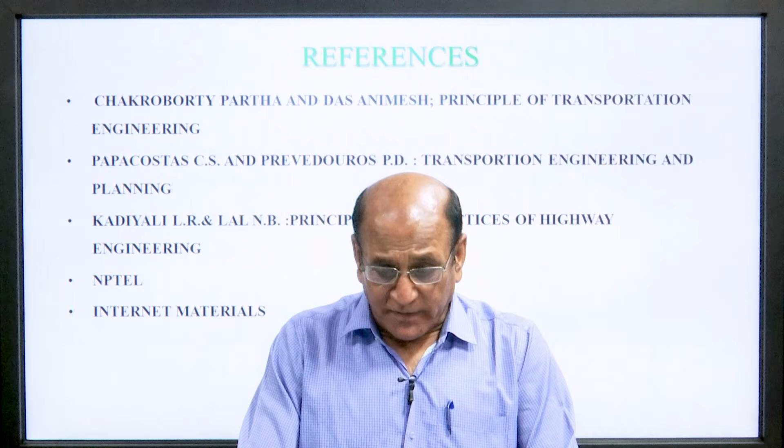References that I have taken as usual: Chakroborty Partha and Das Animesh, Principle of Transportation Engineering; Papacostas and Prevedouros, Transportation Engineering and Planning; Kadiyali and Lal, Principle and Practices of Highway Engineering. Some part have been taken from NPTEL and some part have been taken from internet.

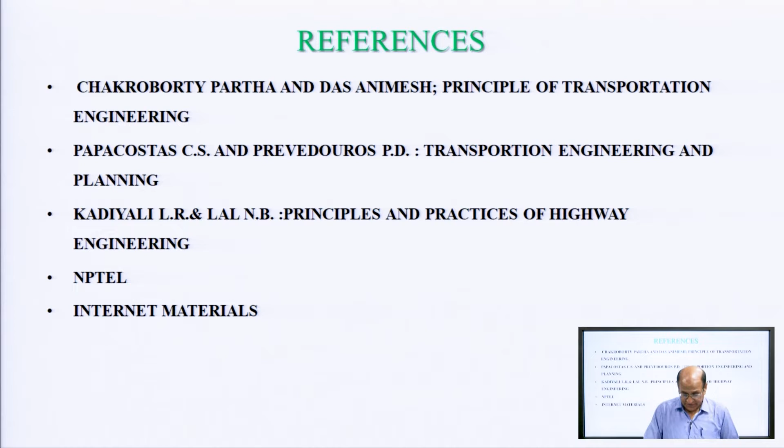The content that we will cover today are urban growth, private vehicles and pollution, land use, urban density, travel pattern, right of way, parking policy, mobility, urban mobility with smart city technology, smart traffic system, future of urban mobility, upgradation of urban mobility policies and standards, and designs for urban mobility.

So first of all, urban growth. One of the biggest problems of urban transport has been its inability to keep pace with the population growth in the city. While urbanization and the growth of the city contribute to economic growth of a city, unplanned growth cannot be sustained in the longer term.

A city that is planned from the beginning for more population, infrastructure and public transport is better equipped to tackle growth. All cities will witness economic growth, but an unplanned city will stagnate due to deterioration of quality of life, while the planned city will continue its progress.

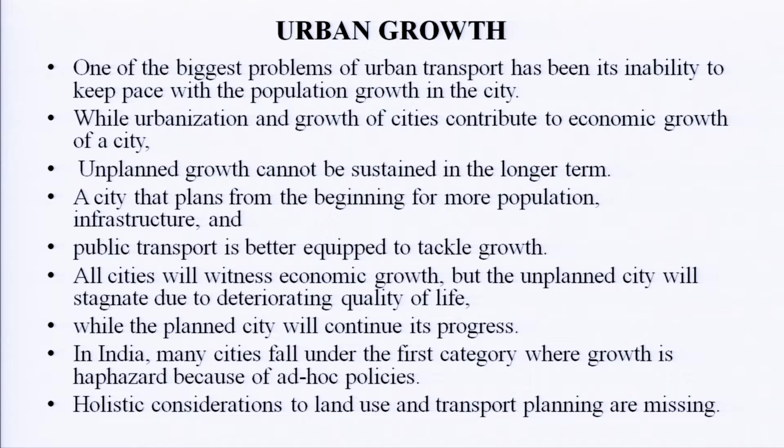In India, many cities fall under the first category, where the growth is haphazard because of ad hoc policies. Holistic consideration to land use and transport planning is missing.

Private vehicles and pollution is a big problem for our country. More and more people opt for their own vehicle. The rise in income level, easy availability of loans, and the status afforded by owning a vehicle has led to tremendous growth in private vehicles.

People who cannot afford their own vehicles opt for other transport modes such as auto rickshaws, chakdas and private minibuses, etc. These vehicles do not always adhere to pollution control norms and result in deteriorating environment.

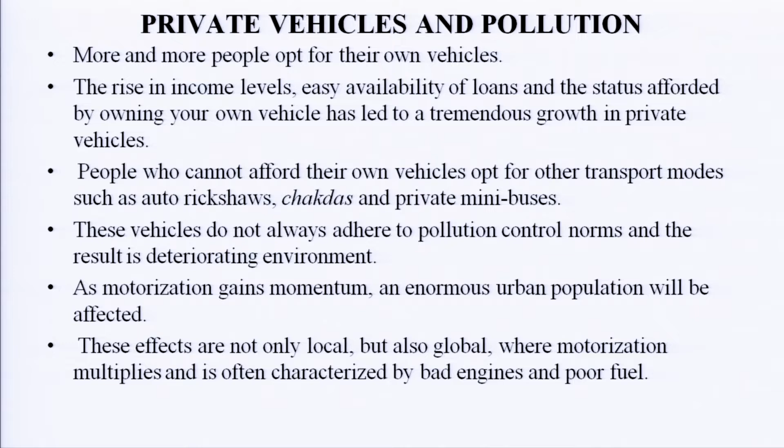As motorization gains momentum, an enormous urban population is affected. These effects are not only local but also global, where motorization multiplies and is often characterized by bad engines and poor fuel.

Pollution associated with transportation is not only from the growth of the number of vehicles, but also from urban sprawl.

Dirty fuel, poor traffic management, and a high proportion of smoke-belching vehicles such as old and ill-maintained buses, auto rickshaws, and two-stroke motorcycles.

In India, development plans and transport plans are taken up as independent exercises. The transportation plan depends more on data than strategy and tends to accept the development plan as sacrosanct.

Generally, they do not make recommendations on improving the development plan and are undertaken as a study meant to reinforce and promote pre-conceived ideas like road widening, grade separators, LRT and metro.

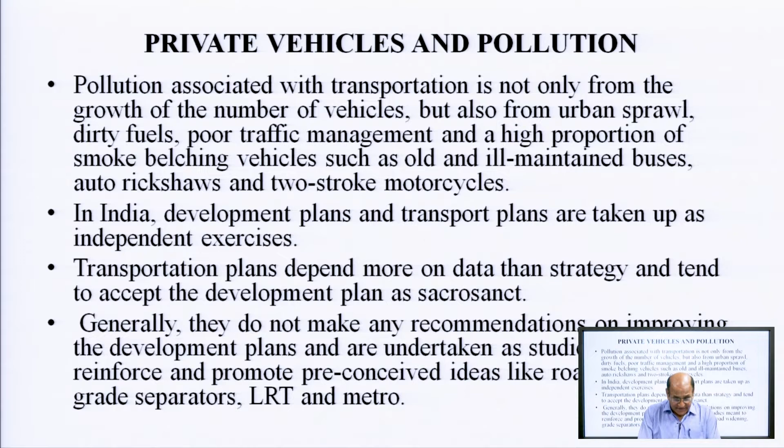Land use is a very important aspect of urban transportation system. We will discuss it separately also, but here we will cover it slightly. In urban transportation system, there is a fundamental relationship between land use, demography and transportation.

Where people live and work, go to school or shop decide the exchange of trips between different areas and roads. Socio-economic, cultural and demographic factors like employment and family income influence the number of trips and how they are made.

The urban transport system affects the accessibility of land and its value, and therefore urban transport is a tool to shape the urban development and urban form.

Ideally, land use planning and transportation planning should go hand in hand. When this is not done, fundamental flaws are built into the city's structure.

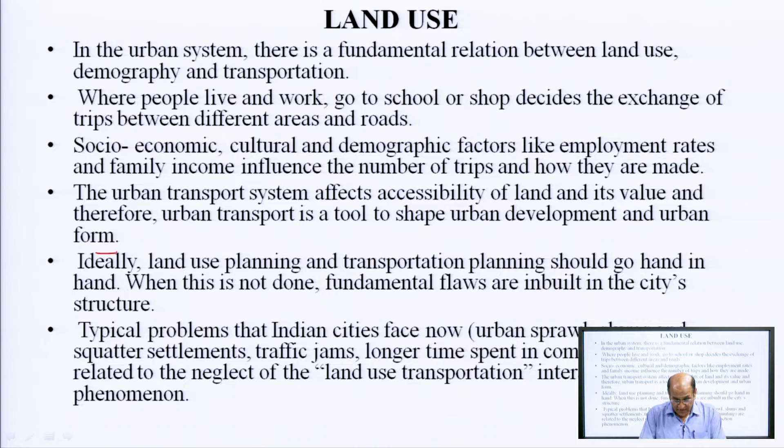Typical problems that Indian cities face now: urban sprawl, slum and squatter settlements, traffic jams, longer time spent in commuting are related to neglecting the land use transportation interaction phenomena.

Most cities that do well with regard to transportation and land use planning tend to be otherwise well managed, which includes being fiscally and financially sound.

Cities that neglect this reality face fiscal and financial difficulties and generally bear heavy environmental costs, and also issues of social equity in transportation remain unaddressed.

The disciplines of urban transport, urban geography, urban economy, city planning and environmental study have long recognized the land use impact of transportation decisions.

For example, when the planner considers widening of an arterial or raising the minimum parking standard, they are generally focused on direct financial cost and give little consideration to factors such as social and environmental impact of increased pavement.

Yet these land use impacts can be comparable in magnitude to other costs and benefits that are normally considered in transportation decision making.

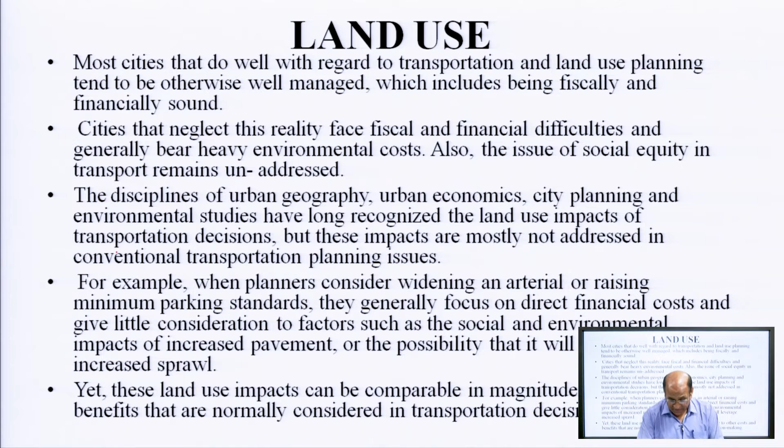Now, with the city having such scattered land use, density gets affected. The ideal city form we are looking for has higher density at the core, at nodes, and along the transport corridor - nodes, core and corridor.

With density gradually receding away from the center or the node and away from the corridor, these dense city core, node and corridor may be in the form of a central business district with the land use mix that is appropriate for local context.

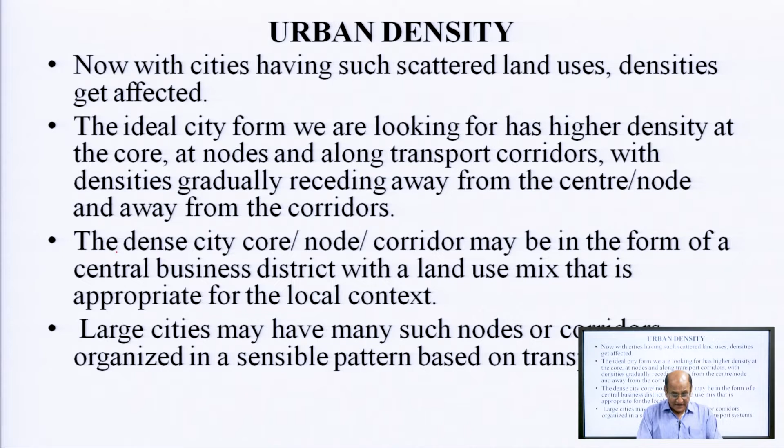Large cities may have many such nodes or corridors organized in a sensible pattern based on the transportation system.

Now come to the travel pattern. Uncoordinated land use and density pattern always result in a skewed travel pattern. In such scenario, it is not unusual to find office buildings scattered over the city, mixed with other land uses.

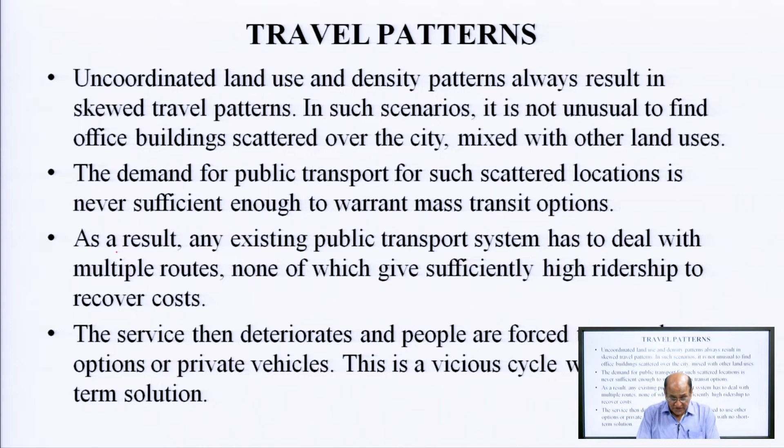The demand for public transport for such scattered locations is never sufficient enough to warrant a mass transit option. As a result, any existing public transport system has to deal with multiple routes, none of which give sufficiently high ridership to recover cost. The service deteriorates and people are forced to use other modes or private vehicles. This is the vicious cycle with no short term solution.

Road patterns are important. They constitute almost 20% of the city land area and are the most important public open space for the city.

Roads define the city structure and influence its spatial growth, determine infrastructure network, and influence the efficiency and productivity of all sections of society. Planning and design of a road network is necessary for ensuring smooth and efficient flow of traffic, safety of the road user, and lowering of air and noise pollution.

Facilitating efficient planning of infrastructure network, increasing the efficiency of the labor market, supporting efficient and economical public transportation system, facilitating more efficient economic construction and maintenance of a street.

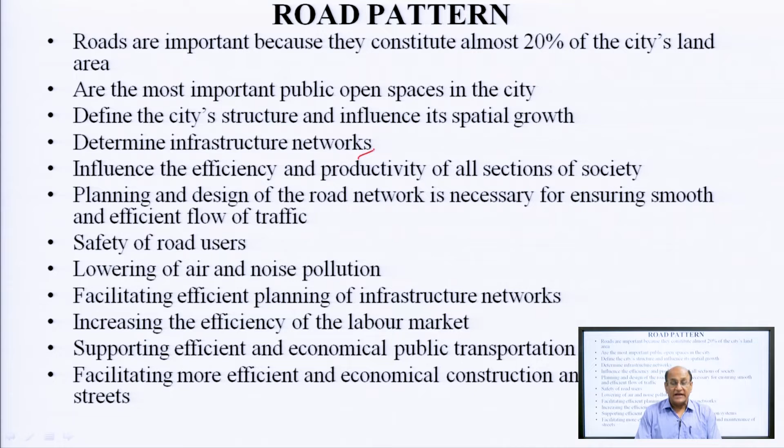Right of way. Another common problem in Indian cities is underutilization of right of way, ROW. A ROW is the width of road including footpath, pedestrian services, cycle track, infrastructure and traffic lanes. Essentially, it is the width of the road from the property boundary on one side to the property boundary on the other side.

In India, our concept of road is the tarred portion of the road. What remains between the asphalt and the property boundary is free-for-all zone, encroached upon by activities like parking, bus stop and hawkers. As a result, pedestrians are forced to walk on the tarred portion, leading to high probability of accidents.

Since ROW is not organized as per the requirement of the transport and non-transport function, most Indian streets are characterized by chaotic and unsafe situations for all users. It appears that roads are treated as leftover space between the buildings.

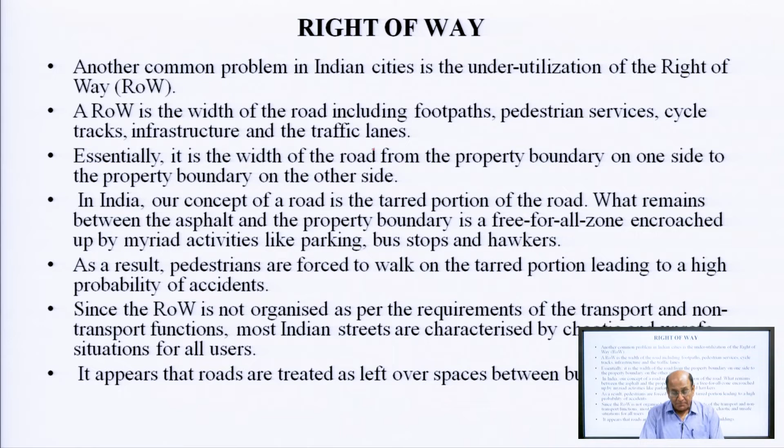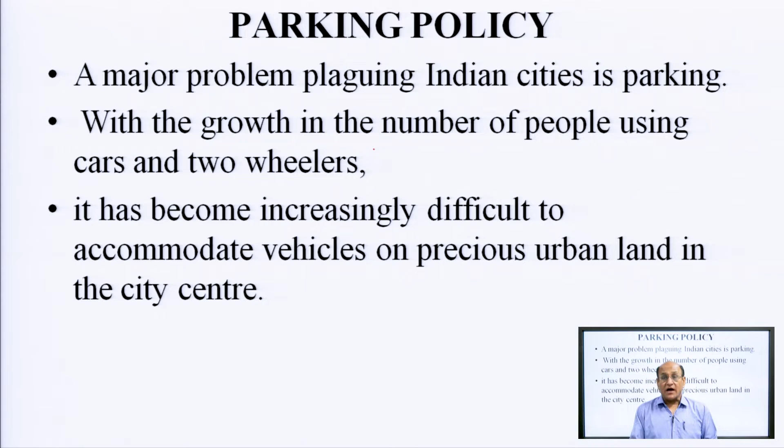Parking policy. A major problem plaguing Indian cities is parking. With the growth in the number of people using cars and two-wheelers, it has become increasingly difficult to accommodate vehicles on the precious urban land in the city center.

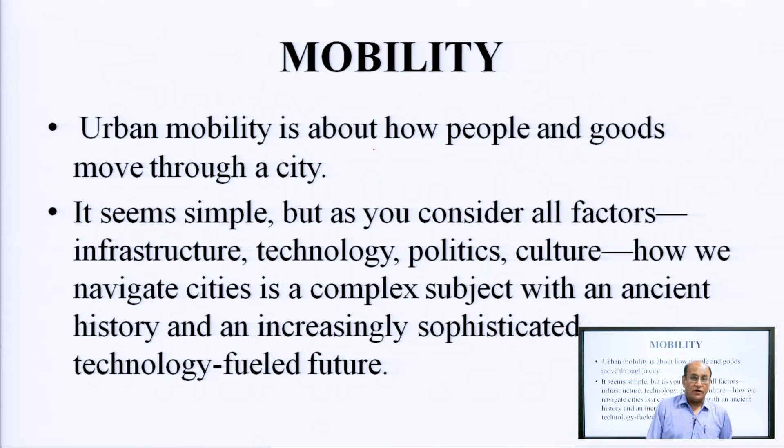Now come to mobility. Urban mobility is about how people and goods move through a city. It seems simple, but as you consider all factors, infrastructure, technology, politics, culture, how we navigate cities is a complex subject with an ancient history and an increasingly sophisticated, technology-fueled future.

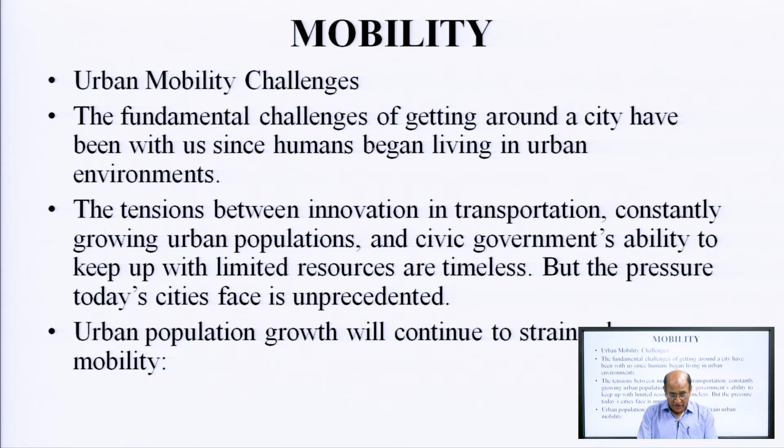Urban mobility challenges. The fundamental challenges of getting around a city have been with us since humans began living in urban environments. The tension between innovation in transportation, constantly growing urban population, and the civic government's ability to keep up with limited resources is timeless, but the pressure today's cities face is unprecedented. Urban population growth will continue to strain urban mobility.

Now come to another factor which affects mobility, that is congestion. Time spent sitting in traffic is a major drain for individual commuters and the overall productivity of world cities. Congested roadways do more than waste time.

Public safety: traffic accidents kill 1.35 million people around the world each year, and leave between 20 and 50 million people with non-fatal injuries. More than half of all road traffic deaths and injuries involve pedestrians, cyclists, motorcyclists and passengers.

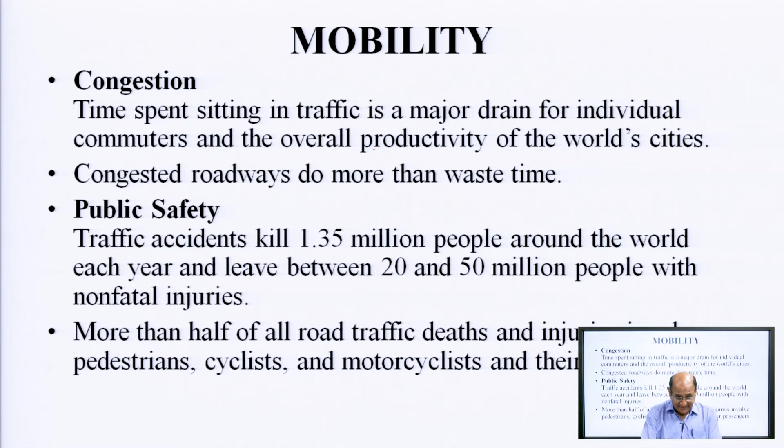Second is public health. Congested stop and go traffic increases the volume of microscopic particulates in vehicle exhaust. According to the World Health Organization, exhaust particulates are capable of penetrating deep into the lung passageway and entering the blood stream, causing cardiovascular, cerebrovascular, and respiratory impacts.

Next is environmental impact. Cities everywhere are concerned about environmental sustainability, and transportation is a major contributing factor. As estimated, 22% of global carbon dioxide CO2 emissions are attributed to the transportation sector, which will rise as cities grow and individual citizens adopt carbon burning transportation.

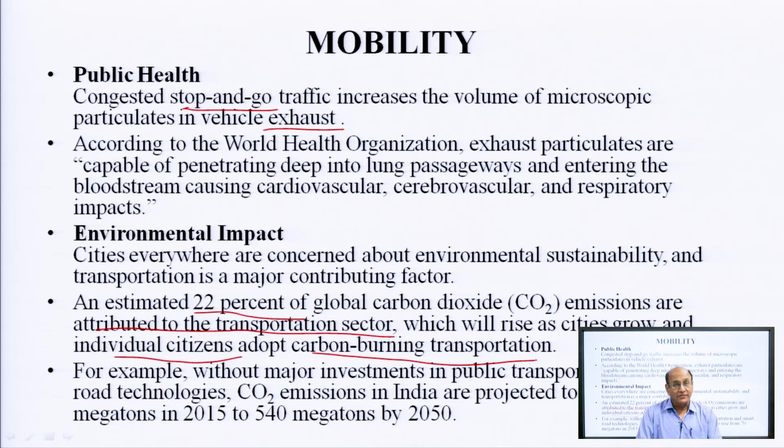For example, without major investment in public transportation and smart road technology, CO2 emissions in India are projected to rise from 70 megaton in 2015 to 540 megaton in 2050. So this is the big impact on environment due to transportation.

Urban mobility with smart city technology. Meeting urban mobility challenges today with smart city technology: cities are improving mobility, saving energy and reducing pollution today with smart city IoT technologies. A smart city takes in data from every available input, traffic signals, cameras, embedded devices on public transit, then analyzes the data with AI and shares it through open data pools.

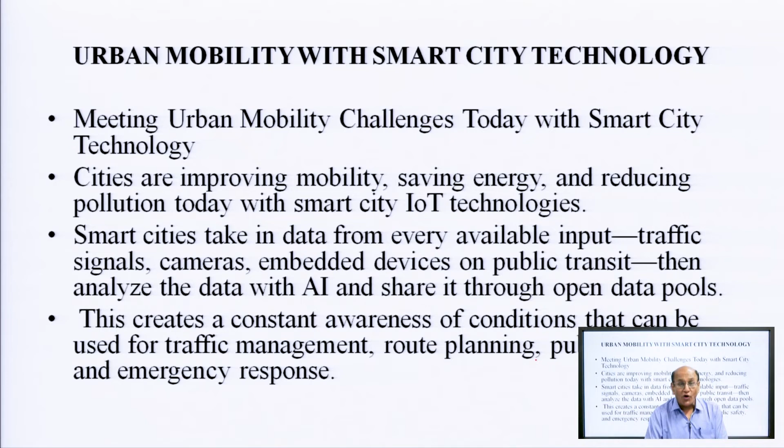This creates a constant awareness of conditions that can be used for traffic management, route planning, public safety and emergency response. Urban mobility with smart city technology, we will discuss one by one.

A smart pavement can monitor weather, road condition and even road wear, and share the information with the driver and traffic controllers. A smart parking can alert drivers to available spaces, reducing time spent circling and searching for a spot. A smart traffic signal can respond to traffic conditions and retime themselves to relieve congestion.

A smart street light with a camera, microphone and sensor can dim themselves when no one is around and gather intelligence on traffic, public safety and air quality. A smart camera can keep an eye on traffic and public safety.

A smart intersection can optimize vehicle and pedestrian traffic, detect risk and warn against imminent accidents, reducing crashes and injuries.

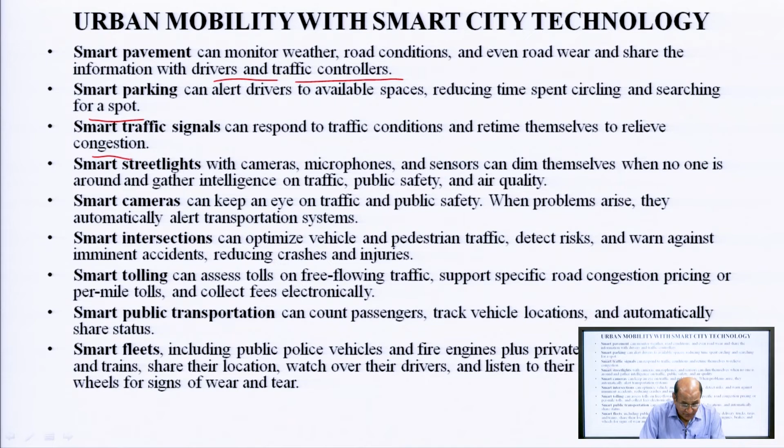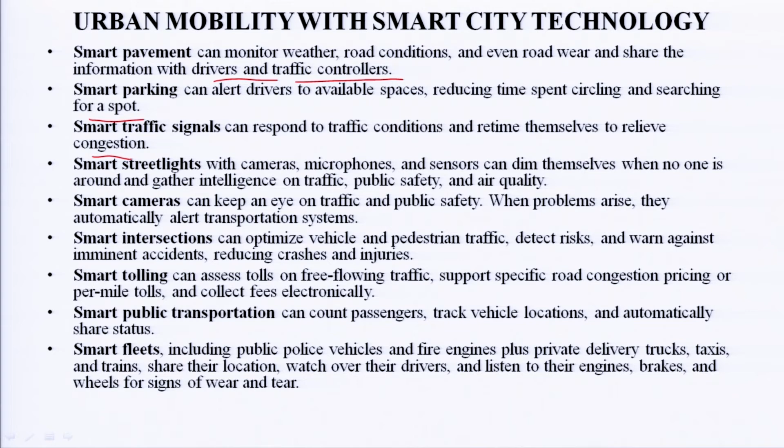A smart public transportation can count passengers, track vehicle location, and automatically share the status. A smart fleet, including public police vehicles and fire engines plus private delivery trucks, taxis and trains, share their location, watch over the driver, and listen to the engine, brake and wheel for signs of wear and tear.

So in UP we are using a FASTag for this purpose, and the government is now going to implement it mandatorily. Now, a smart traffic system.

A smart traffic system can save commuters up to 60 hours a year. Together, these intelligent sensors, microphones and cameras can power a model of what is happening in a city, a street, highway and rail lines in near real time.

With the help of artificial intelligence, this awareness can transform passive traffic management into an active, intelligent transportation system. This system can anticipate congestion, automatically reroute traffic, retime lights and apply dynamic tolling to help keep the city moving.

The city of Bangkok, Thailand has saved over 51,000 commuter hours in a year.

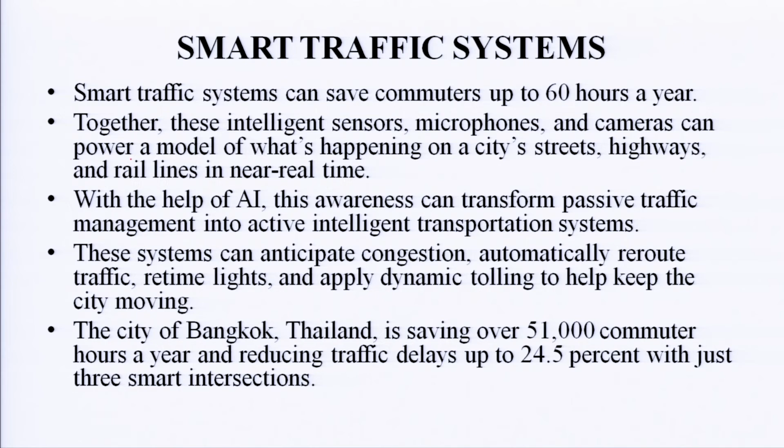Future of urban mobility. Multiple technologies are coming online that will fundamentally change how people and goods move through the city.

Vehicle communication technology will turn the current state of unpredictable, dumb vehicles into smart, active players within the smart city intelligent transportation system.

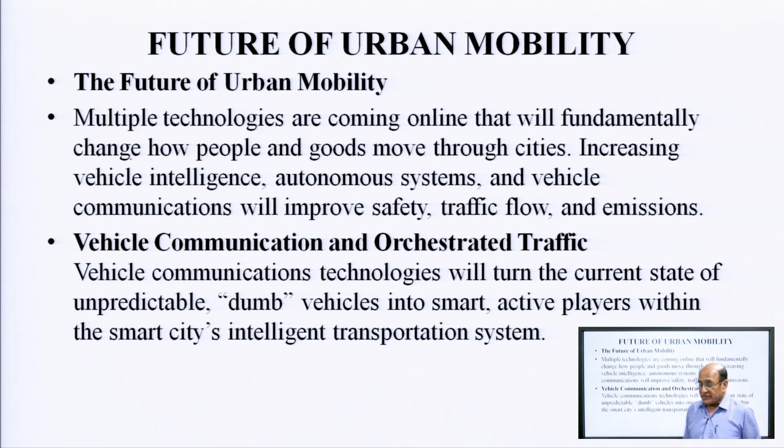Future urban mobility: vehicle communication between individual smart vehicles, and from the smart vehicle to the central traffic management system, will help traffic flow as an intelligent unified whole that maintains consistent speed and set vehicle distances throughout. Fuel efficiency will increase dramatically as accidents drop and pollution decreases.

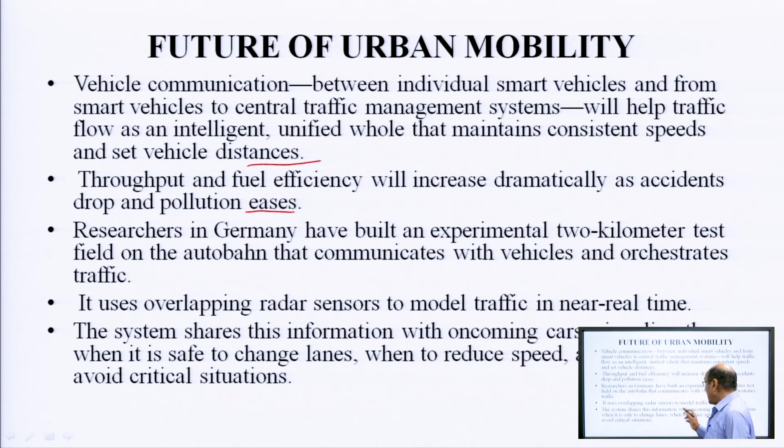Researchers in Germany have done a lot of work in this case. It uses overlapping radar sensors to model traffic in near real time. The system shares this information with oncoming cars.

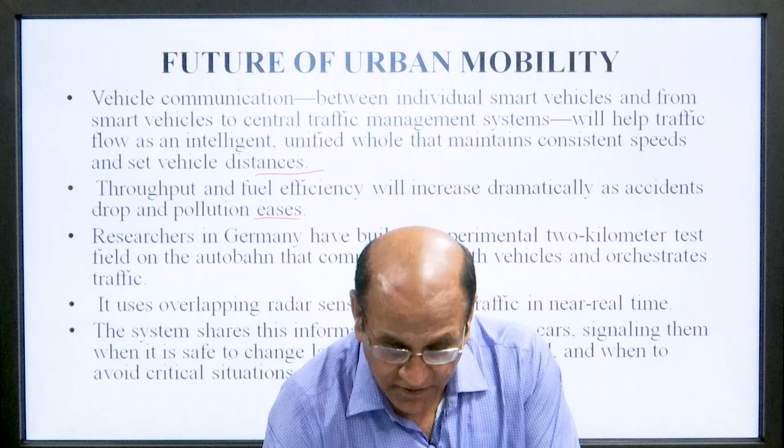Future urban mobility uses overlapping radar sensors to model traffic in near real time.

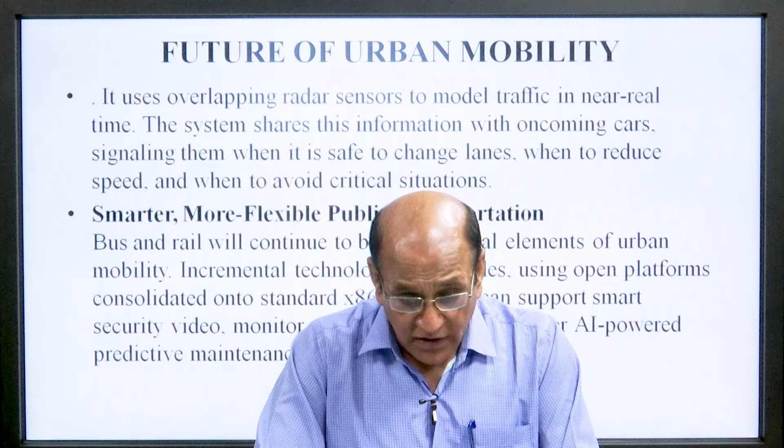A smarter, more flexible public transportation - bus and rail - will continue to be fundamental elements of urban mobility, with incremental technology upgrades using an open platform consolidated onto standard x86 hardware.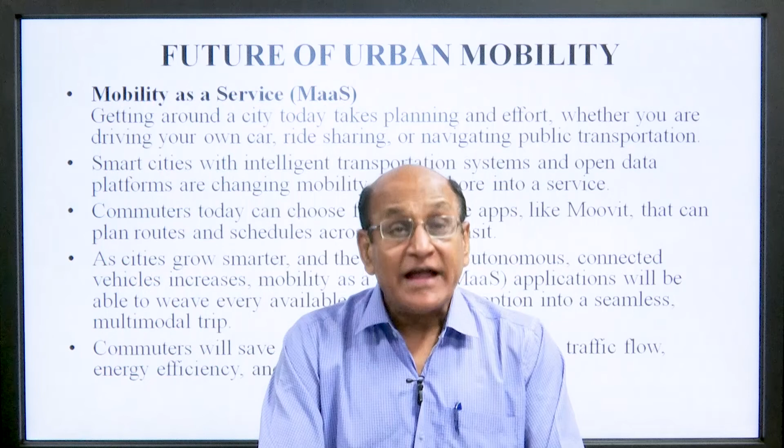Mobility as a service, MaaS: getting around a city today takes planning and effort, whether you are driving your own car, ride sharing, or navigating public transportation. Smart cities with intelligent transportation systems and open data platforms are changing mobility from a chore into a service.

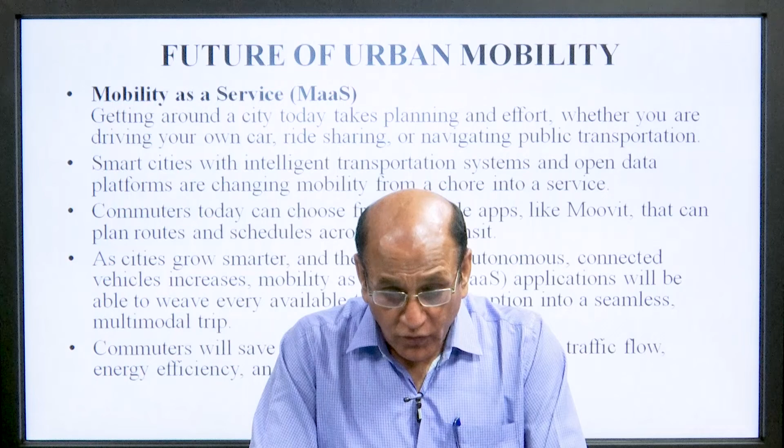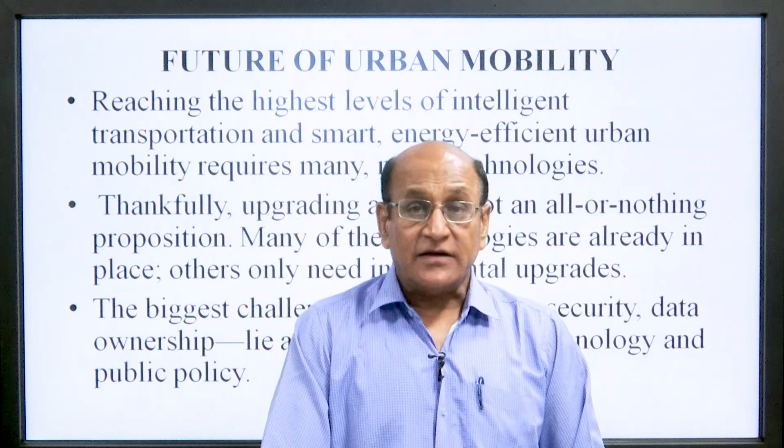Reaching the highest level of intelligent transportation and smart, energy efficient urban mobility requires many technologies. Upgrading a city is not an all or nothing proposition. Many technologies are already in place; others only need incremental upgrades.

The biggest challenges - privacy, data security, data ownership - lie at the intersection of technology and public policies.

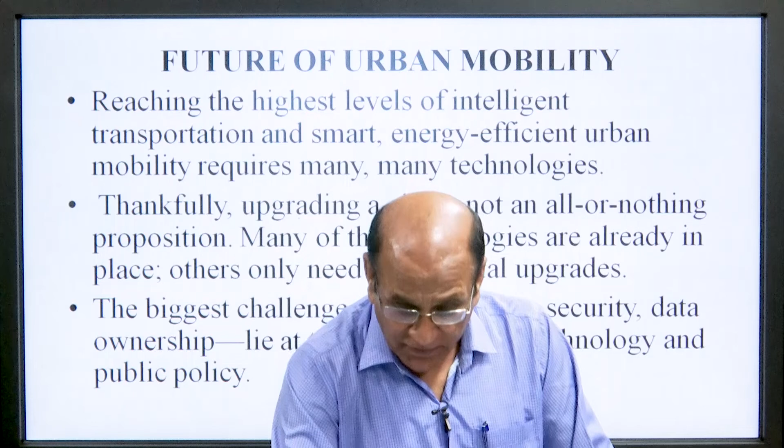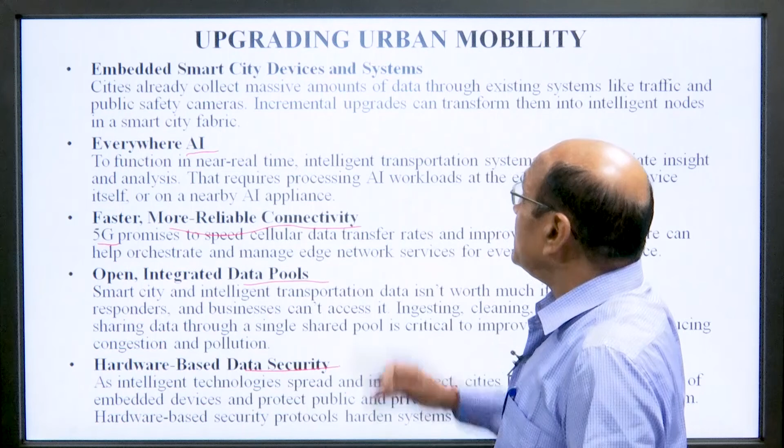Upgrading urban mobility: there are embedded smart city devices and systems everywhere, artificial intelligence, and faster, more reliable connectivity. This will come with 5G, open and integrated data pools, and hardware based data security. So these are the areas where upgrades are needed for mobility of the urban transportation system.

Public policies and industry standards are crucial for developing smart city technology for urban mobility, and for deploying the IoT technology that makes them possible.

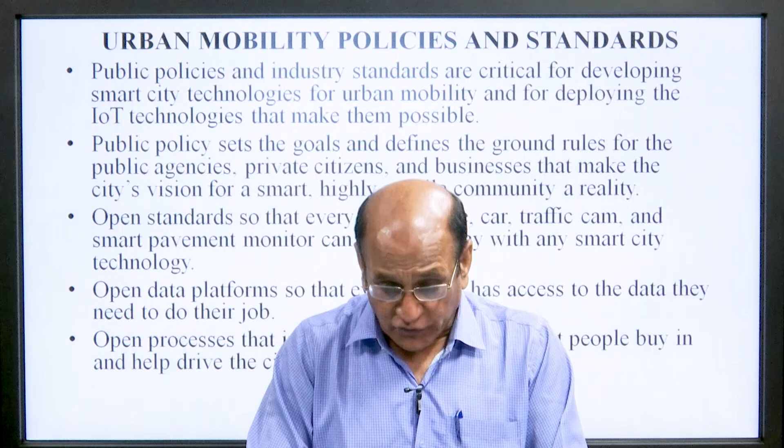Open data platforms, so that every player has access to the data they need to do their job. Open processes that include all stakeholders, so that people buy in and help drive the city's technological vision.

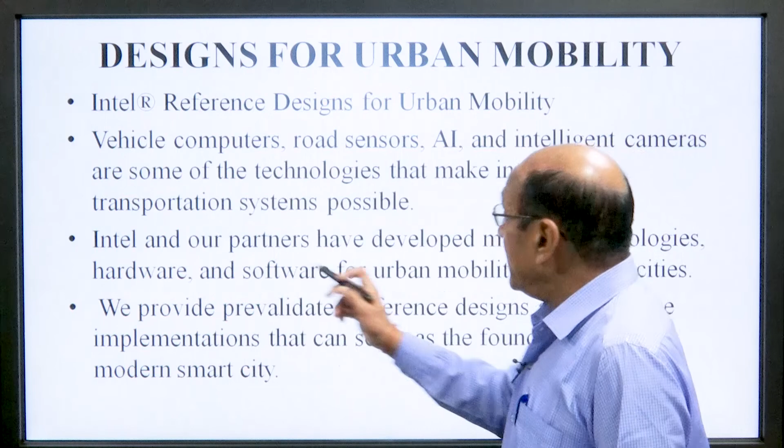Design for urban mobility: these are based on Intel's reference design for urban mobility - vehicle computer, road sensor, artificial intelligence and intelligent camera are some of the technologies that make intelligent transportation systems possible.

We provide pre-validated reference designs and reference implementations that can serve as the foundation for a modern smart city.

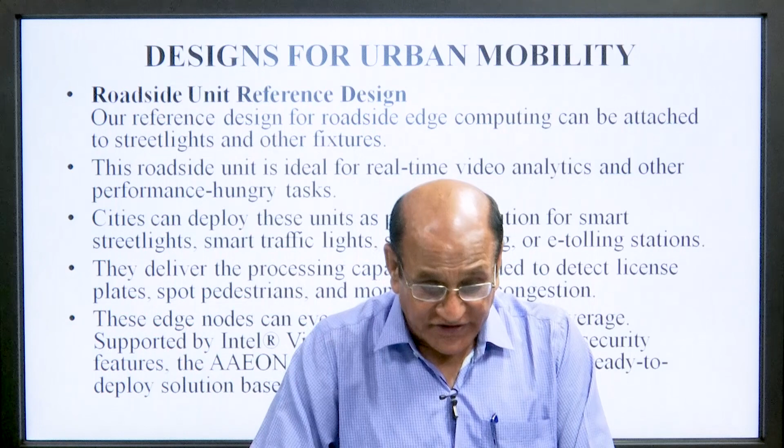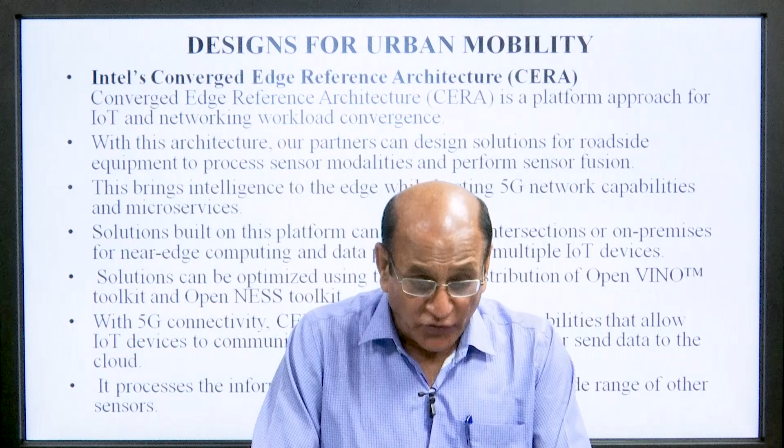So Intel's Converged Edge Reference Architecture, CERA, is a platform approach to IoT and network workload convergence.